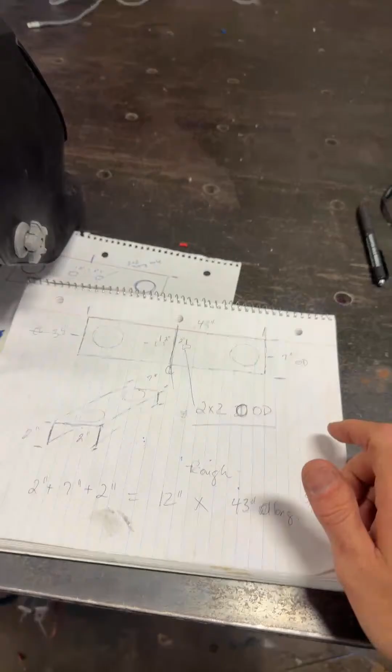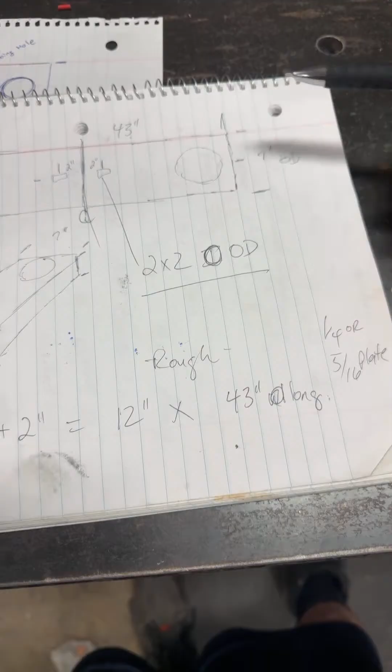So let me show you what I got going on. I'm building a chain bridge and I need it to be 7 inches on the inside. I need it to be 7 inches on the inside right here. So from here to here, I need it to be 7 inches. From here to here, I need it to be 2 inches. And from here to here, I need it to be 43 inches long.

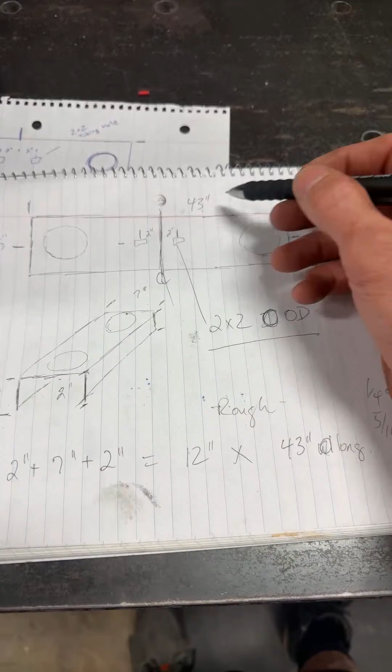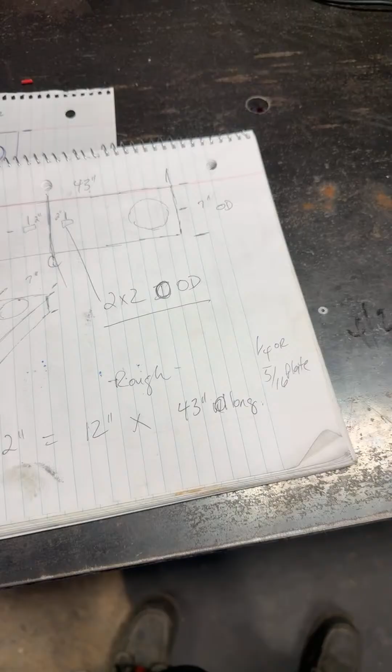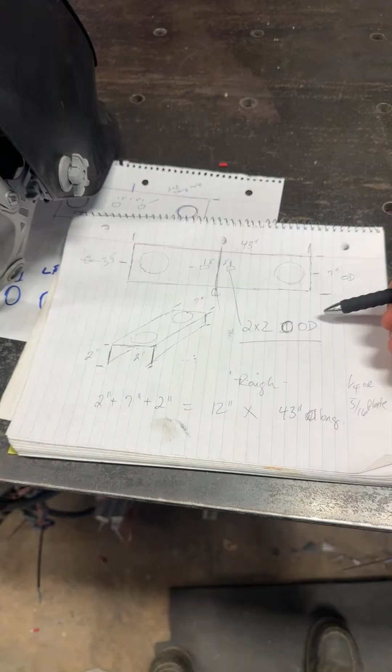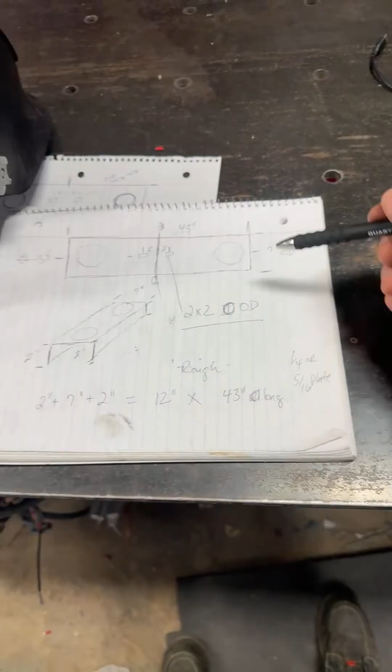Oh, appreciate it. All right, so I went up to the place where I used to work at a long time ago in high school. Yeah, it's a nice car, it's a nice car. So I want to build this out of 1/4 inch or 5/16 plate.

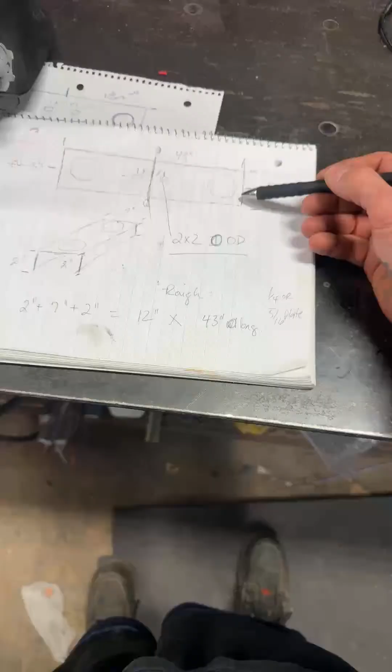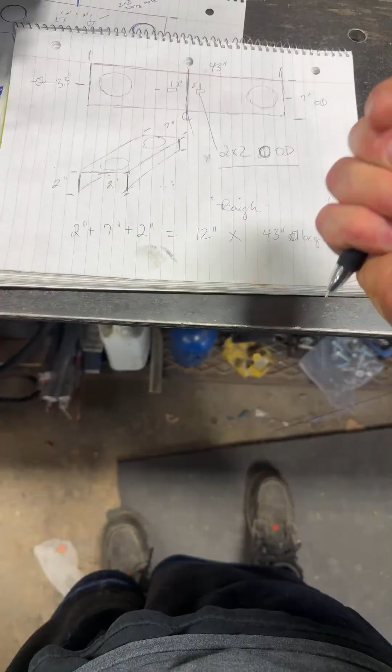So what I asked them to do was, I asked them to cut me a piece, shear me a piece of 1/4 inch or 5/16 plate. 2, 7, 2, so that's 7, 8, 9, 10, 11, 12 inches. So I need a piece of plate that's 12 inches wide by 43 inches long. Right, that's what I need.

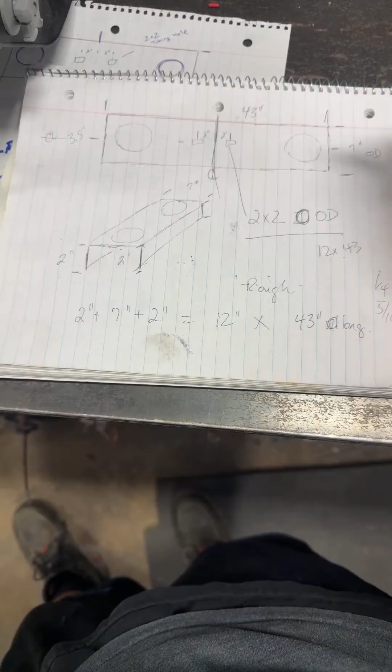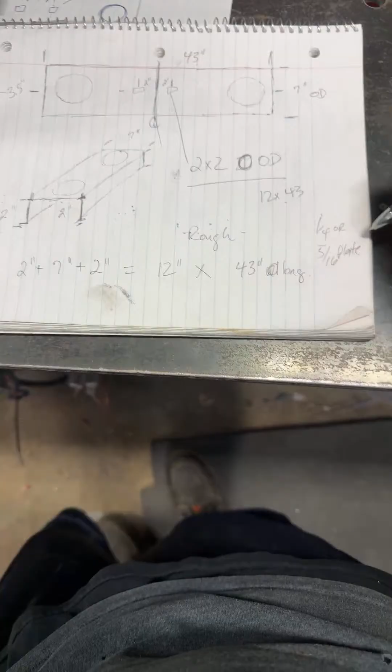Then, since they have a 100-ton press up there, I told them to bend it 2 inches, 7 inches, 2 inches. So they're going to make me, out of 1/4 inch or 5/16, whatever they had, at least 1/4 or 5/16. 5/16 is thicker than 1/4.

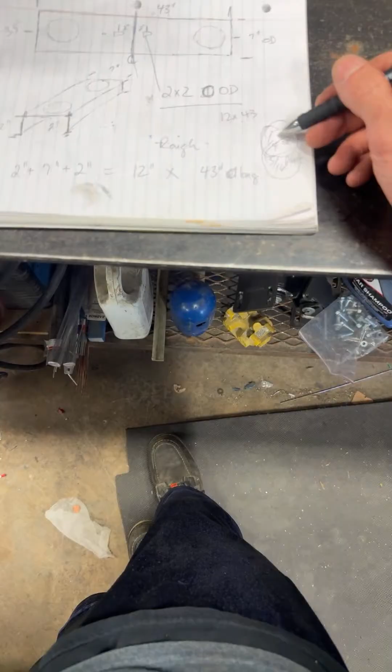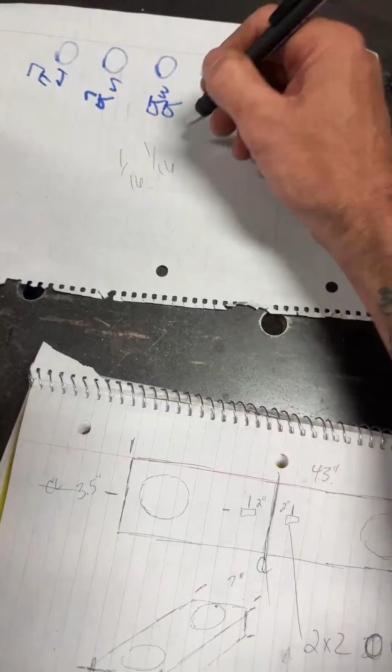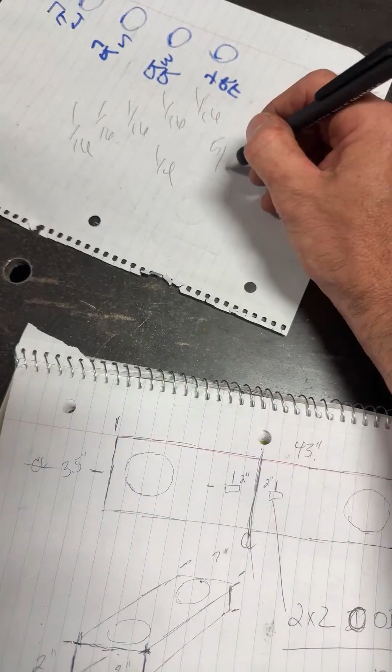Because if you look, you got 1/16, 1/16, 1/16, 1/16 - right, you got 4, so that's 1/4. If you got 5/16, that's 5/16, that's a 1/16 thicker than 1/4. So I told them either 1/4 inch or 5/16. So they said, cool.

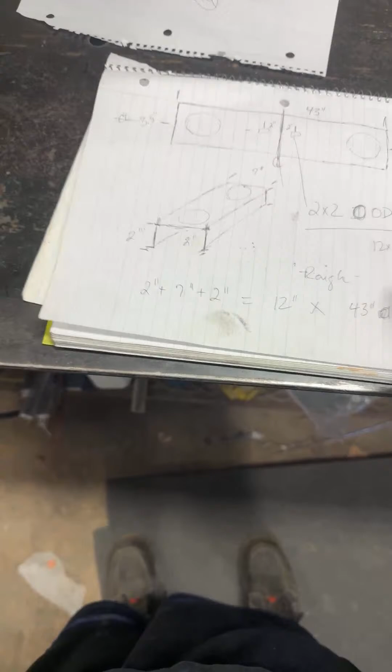So they're gonna make this today, they're gonna make the channel for me. So once they make the channel and I get the channel back, then what I'll do is I'll come over and I'll cut this hole out, I'll cut this hole out.

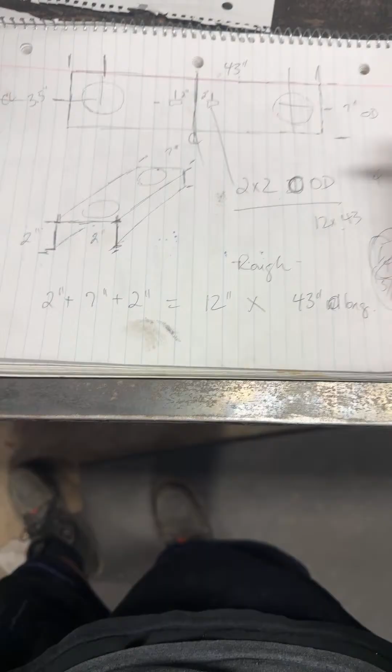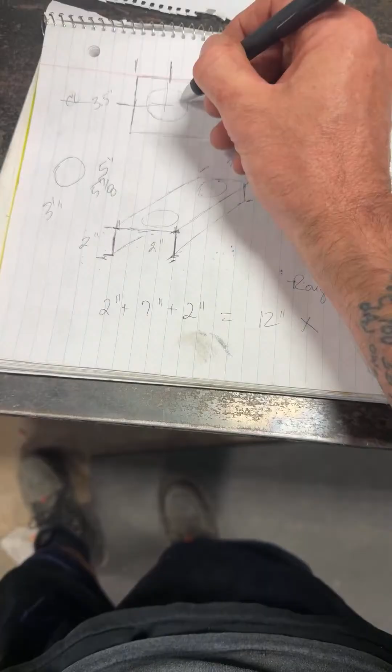And then also, I got a piece of pipe. I got some pipe that's 3 inches long. Actually, it's 5-inch pipe, which measures 5 5/8 on the inside. So it's 5 5/8 on the inside. I'm gonna put stovepipes or raised, whatever you want to call it - I'm gonna put spring pockets.

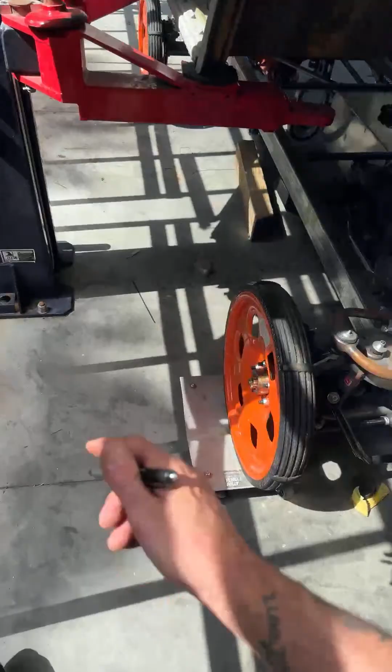I seen one guy build his chain bridge, and all he did was put a piece of 3-inch pipe to hold the spring. And when I mean hold the spring, these are not the springs, but this just kind of gives you an idea - these are the springs, these are the springs for this.

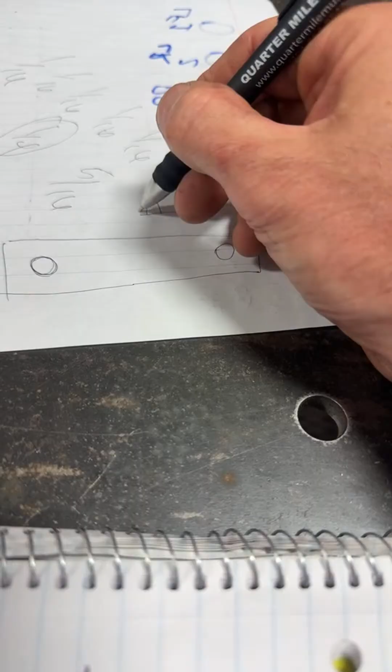So I watched this one guy, he didn't do drop pockets, I call them drop pockets. So what he did was, he took the piece of channel, right, he took the piece of channel and he welded a piece of pipe on the inside, and then the spring set like that, and then here's your rear end. I know this is upside down, right.

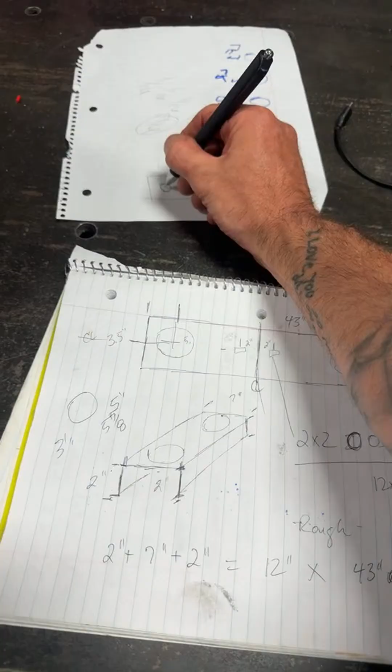So he made a piece of pipe that went inside here. So when it was on the chain bridge, when the spring was in the chain bridge pocket, there was a pipe that went in here. Then the hydraulic cylinder goes through here, and then on the chain bridge, there was another pipe, 2 1/8 pipe, DOM tubing, that the hydraulic cylinder went through so it doesn't move.

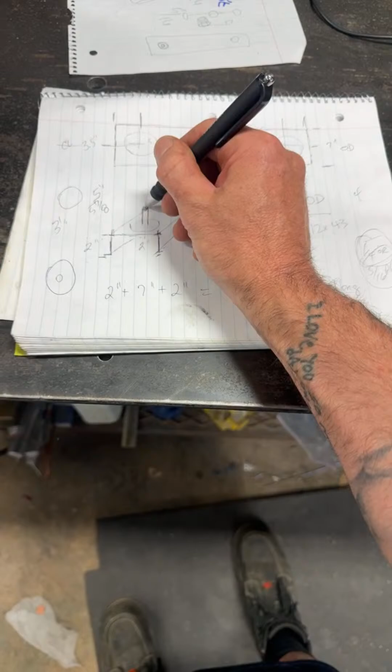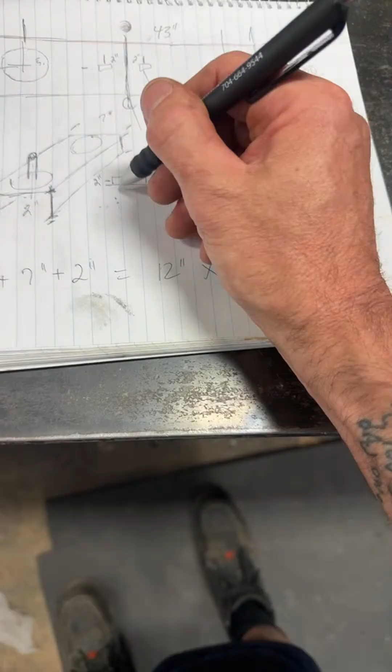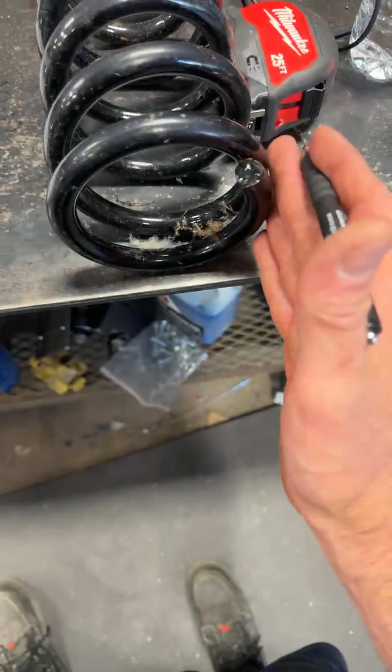I'm not doing that. I am putting a piece of tubing, DOM tubing, for the cylinder to run through. But I am doing raised pockets, so when you look at it from the side, I'm doing raised pockets about 2 inches, I think that's where I'm at. So what that's going to do is let the spring set into this another 2 inches. Plus it'll have a pipe in the middle that holds the spring, so the spring will be cradled on the outside and on the inside.

Yes, yeah, that's right. I'll be on the backyard boogie welding pieces together. Hey, there's nothing wrong with that, Elko. I just can't do that, you know what I mean?

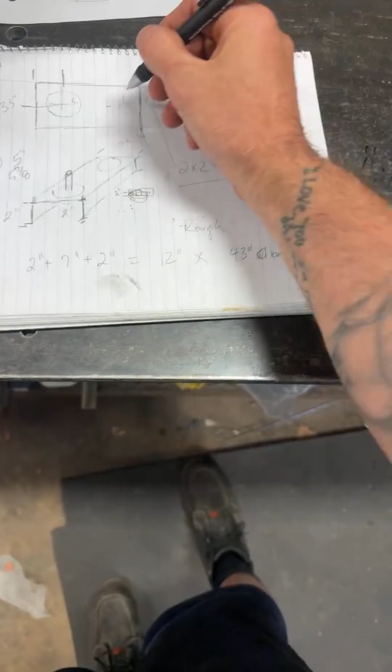So that'll be one piece. And then in the center right here, we're going to cut two. I'm going to cut 2 1/8 by 2 1/8 holes right here.

All right, so you go center line.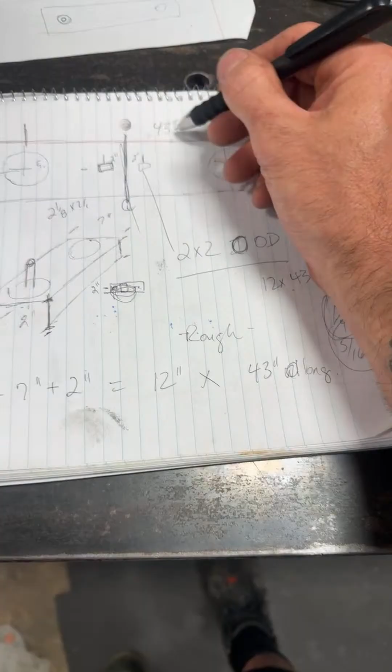Man, I found a lot of videos on YouTube on building chain bridges, and nobody will give the information. Nobody will give numbers. They just say, I'm building a chain bridge, they don't give no numbers or nothing. I guess they're afraid somebody's going to take some money out of their pocket, man. There's 6.8 billion people in the world, and you're worried about somebody trying to steal some money out of your pocket. My clients are not your clients, and your clients are not my clients. I don't understand. But just as soon as I get all this material on the table, you better bet your sweet ass that I'm going to give every measurement out online, every bit of it for free.

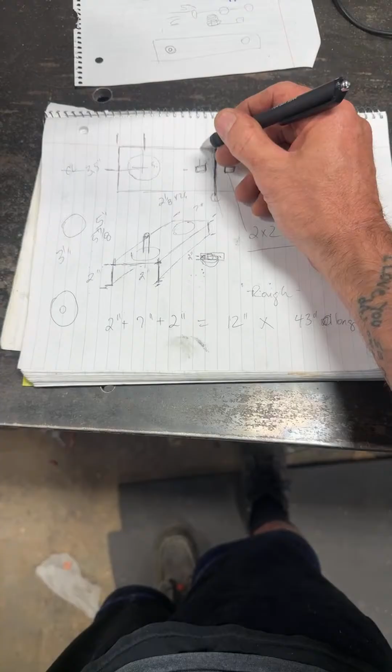I don't understand. So I'm going to come center line. So you got 43, so half of 43, you come half of 43, and then I'm going to measure over 2 inches this way and 2 inches this way, and then I'll center line it this way, which will be 3 1/2, and I'm going to cut a 2 1/8 hole right there. And that 2 1/8 hole right there is going to be for this right here.

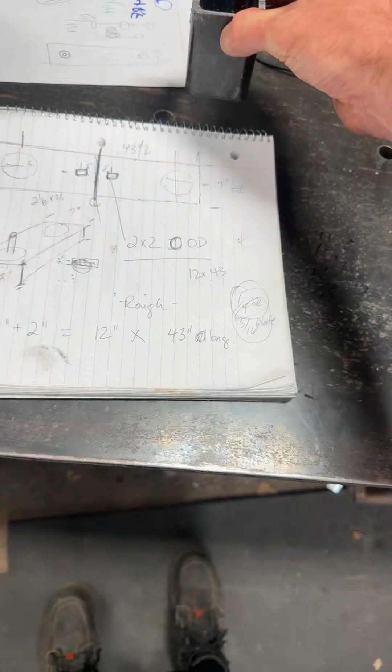So this is going to be the chain pocket. So this will go in. There'll be 4 of these. There'll be one here, and there'll be 2 on the axle, right?

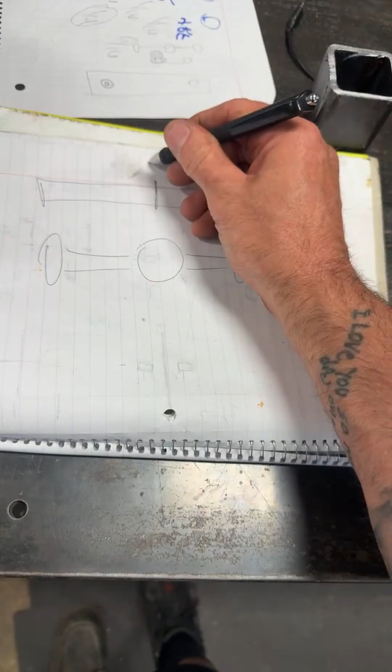So basically, you got the rear end, right? You got the rear end, and then you got your chain bridge, right? So center line, that's what that means, center line. I'll have one of these there, and I'll have one of these there. And then you'll have the spring, then you'll have your hydraulic cylinder. I'm running power balls, so you'll have a power ball, right? Okay, you have your pocket, then you have your spring, then you have your cylinder, and you have your power ball pocket, right?

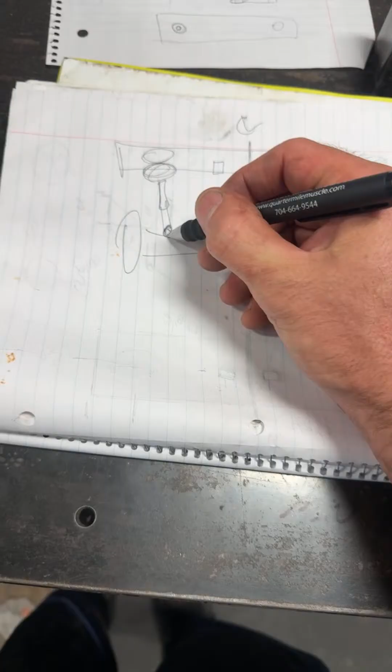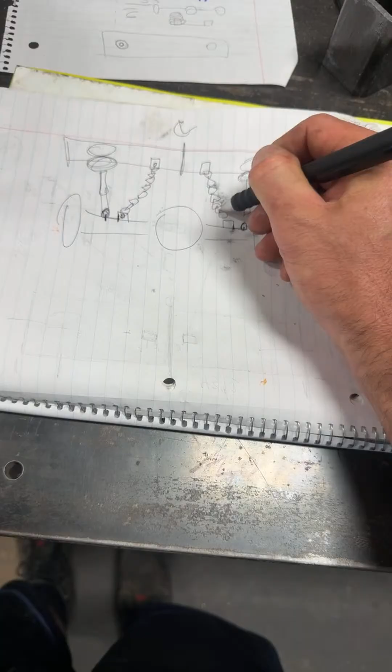You measure from the edge of the center line of this cylinder over 2 inches. Everybody's going over 2 inches. And then you put another one of these on top of the rear end, all right? Then you drill a hole, and then you run your chains, right?

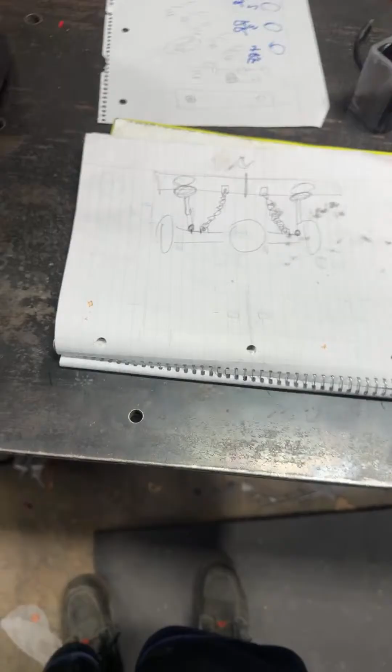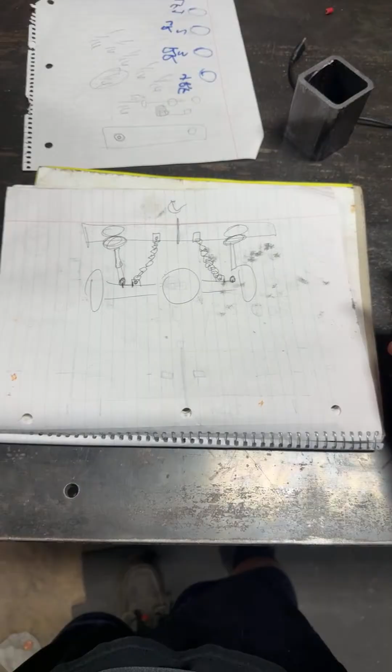Oh yeah, it's- I'm not doing it for competition. I'm doing it to ride, man. I don't give a shit one way or the other. I'm doing it to ride. I don't care nothing about trophies. I don't care about competition. I've already got all my stuff in my life. My first part of my life, I done all that. Got awards, got SEMA awards, got all that. I ain't into that, look, I'm not into that.

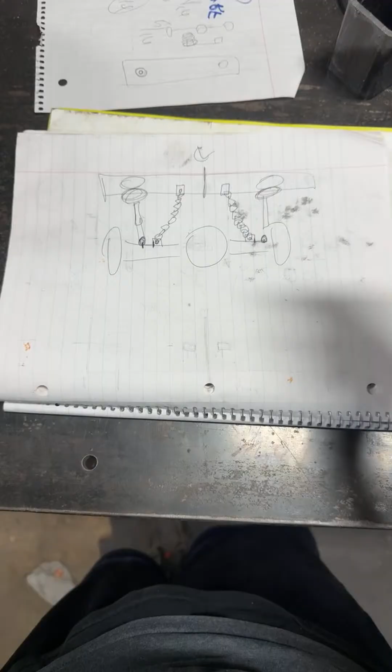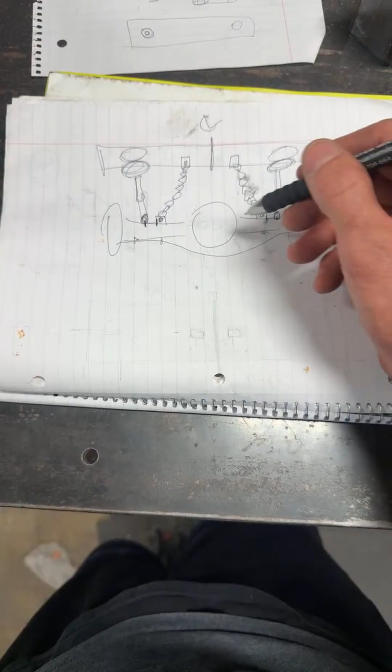So then I will brace up the rear end. I will bridge this, and I'm probably going to run some DOM tubing and build a frame, and then I'm going to do it this way too. I'm going to brace this up. So basically, here's your frame rails, right? These are your frame rails, and then you chain bridge. By doing it this way, you got your cylinders.

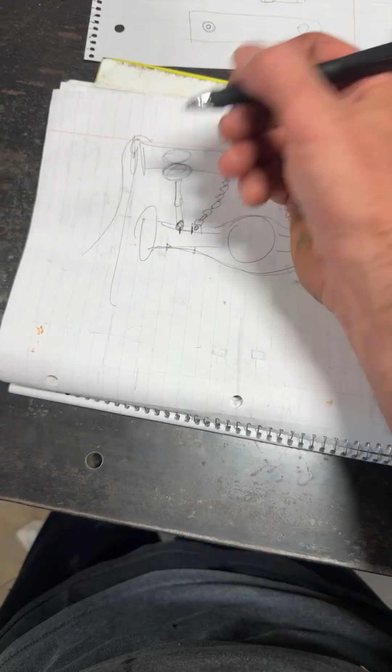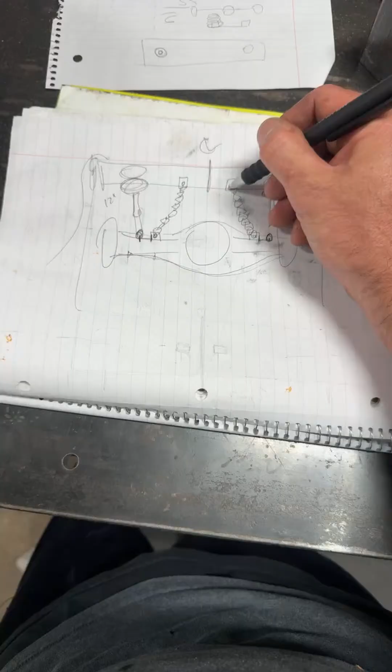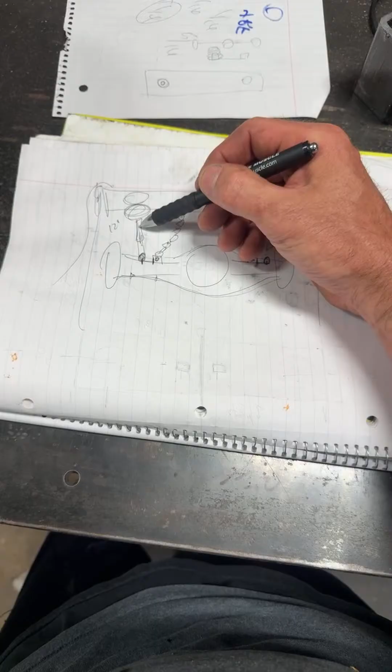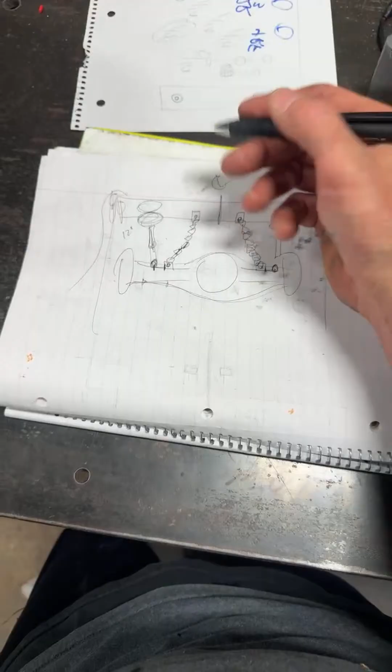Let's say you got a 12-inch cylinder. So what you do is you cut the difference and you shorten your links by a few links. And what that does is that gives you a pivot point. So basically how that works, it's a pivot point. So when you add fluid to this cylinder and this cylinder pushes up, what happens is this cylinder is putting a lot of pressure. And then this chain gets tight. And as this chain gets tight, it kicks it, it pivots. And the whole car pivots, all right?

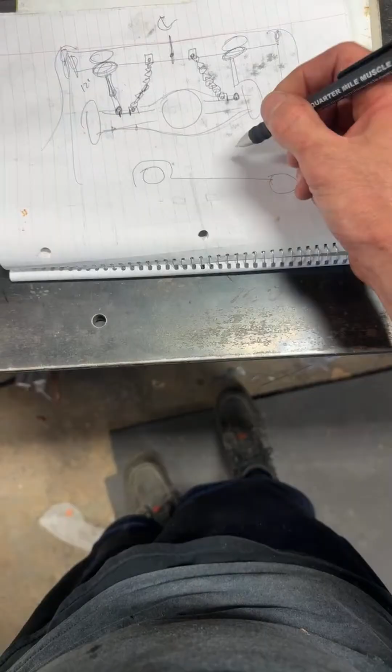So when that pivots, what happens is your front wheel- you get standing three wheel. You get standing three wheel. So that's what happens.

So that's what I'm working on. I'm getting all my parts together. I got a tracking number. It says all the hydro stuff is supposed to be here next week after Memorial Day. So we'll just see.

But let me show you what we're doing right now. So I went and picked up some rebar, cut this rebar, and I'm putting this rebar from there to there. You're probably wondering why, so let me show you what I'm doing.

Oh yeah, I got a bunch of stuff ordered for this. I got another fuel pump ordered because the fuel pump's bad, so we're gonna put a new one in. Matter of fact, I went and got it today. Here's the fuel pump, I got all the fuel pump stuff, so now I can put a new fuel pump on this and get it going.

All right, so this is what we're gonna do. Let me show you. Just let me show you what we're going to do. Y'all stay with me for just a second, stand by. I appreciate you. All right, here we go, let me show you what I'm doing.

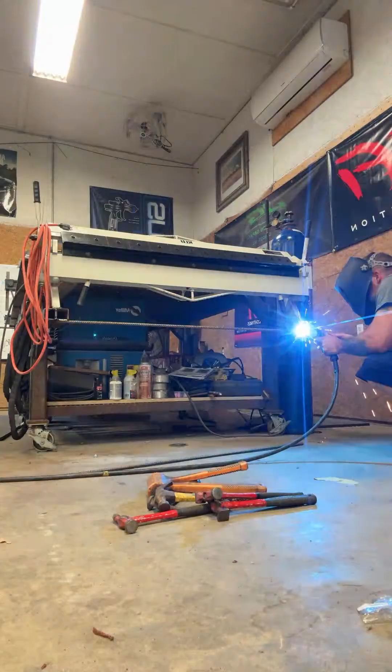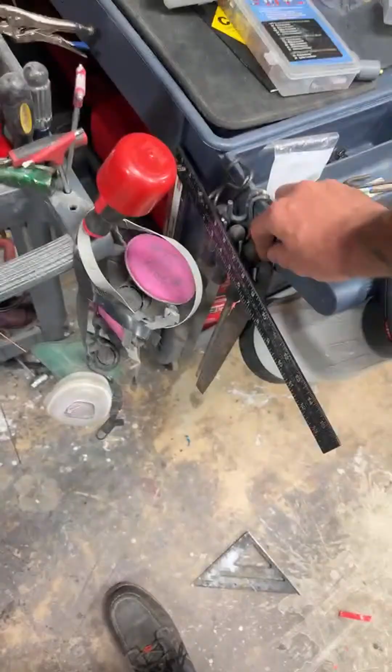Also, I mean, I can get, I can clean up my carts. I can clean my carts up. Take my flat bastard files, you know what I mean? I can come over here and look at here. Look.

Look at her. Huh? What y'all think about that? Try to be a little bit more organized. Look at these flower pot holders I made a long time ago. Look at these flower pot holders.

Check these out, I turned them into daggone drop cord holders. So that's where I'm at on that. Oh, y'all want to see something cool, man?

Let me show y'all something, y'all ain't gonna believe this. Damn telemarketers, man, I swear they'll come through and mess up your whole news feed, even though you got daggone do not disturb.

That finger brake is on wheels. It just transferred mess from one cart to another. No. Mike, this is my welding table, this son gun right here don't get moved, this thing don't get moved much. But I see what you're saying, yeah, I just moved my mess from one side to the next.

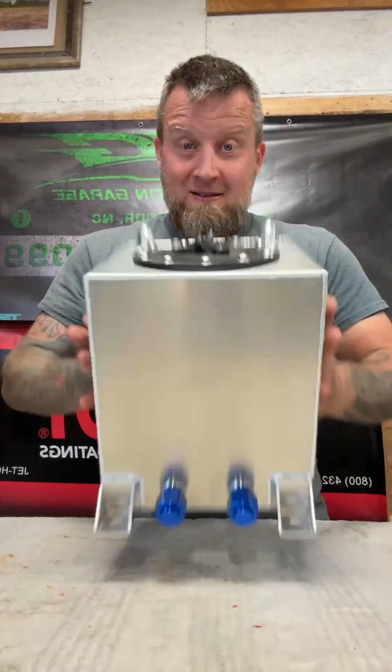Look at this tank. I got to get a haircut today, too. Where's Unc at? Unc, I need a haircut.

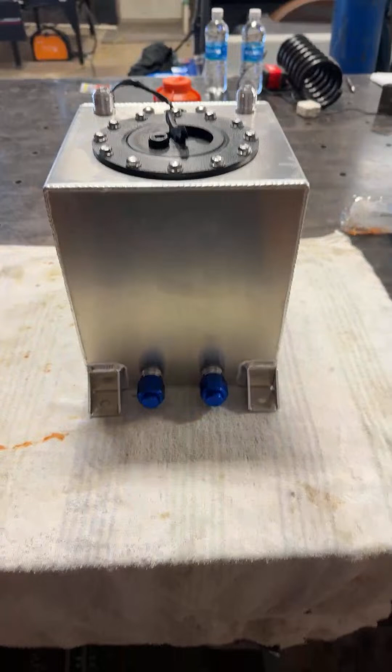Look at this gas tank. This is a 2.5-gallon gas tank. Now they make them bigger, they make them 10 gallons, 8 gallons, 4 gallons, 15 gallons, 20 gallons. But look at this fuel tank, right?

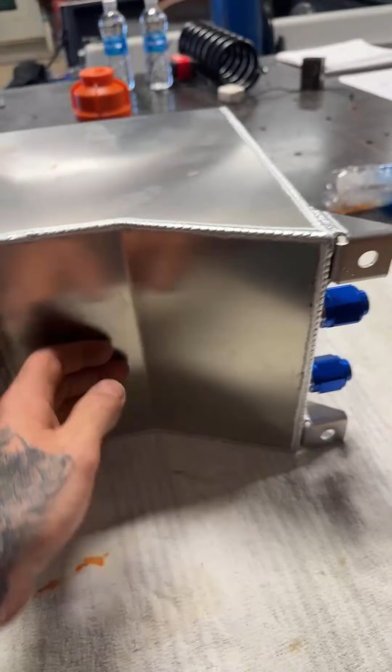First of all, let's look at the welds. Very, very nice welds. Let's look at the bottom. It's not completely flat on the bottom. The reason why is because this is the pickup, so all the fuel runs right here. It's actually called a drifter, for drift racing.

All right. Hey, if Unc gets me right, I'll give him five dollars.

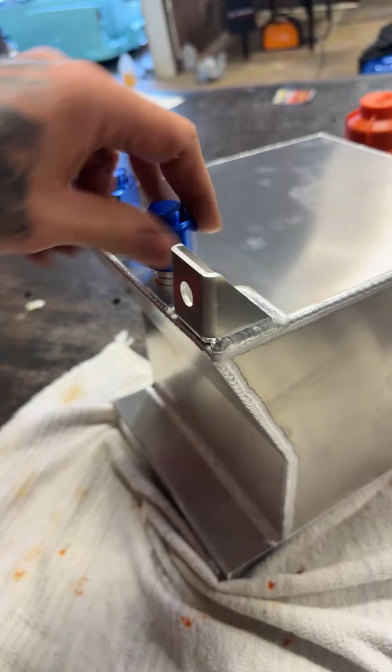This thing is really, really nice. These are AN fittings, these are -10, so it's basically 5/8. It did come with two plugs, so I don't have any -10s, I had to order them. So I ordered -10s, from -10 to 3/8 fuel injection line. So that's that.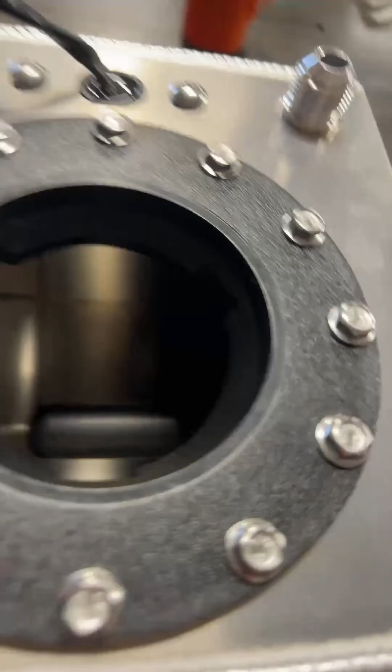They make these in black, but I went with aluminum. It also has a gas cap, it's vented. And it also has foam in it to keep it from sloshing. There's a little bit of foam in there, a foam ball, to keep it from sloshing. It also has a GM style sending unit, so it has a gas level in there.

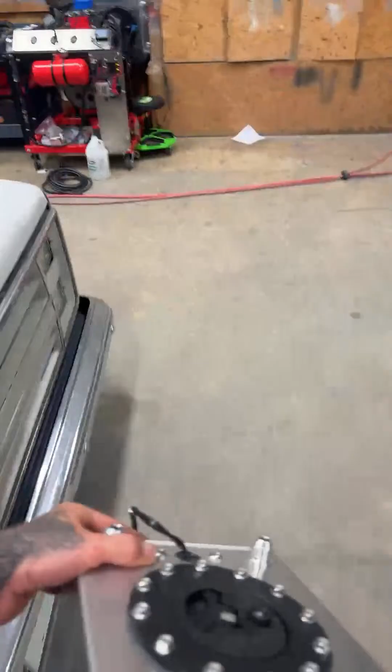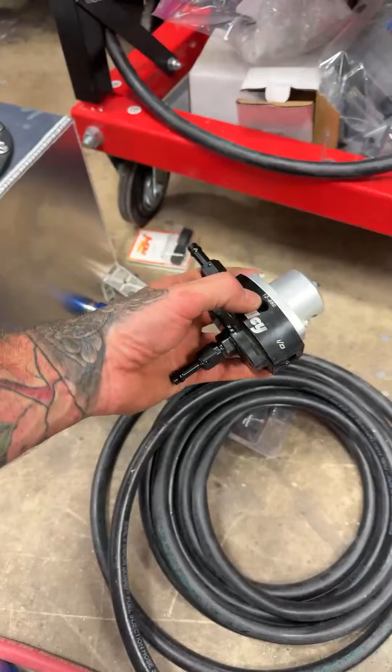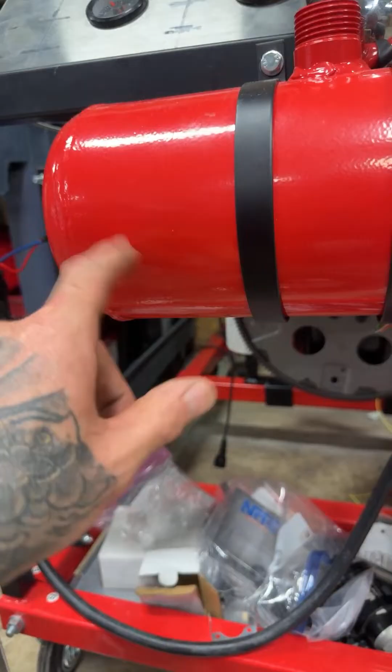So anybody want to take a guess how much this thing was? I'll tell you, these fittings right here are like $12 or $13 a piece. This, Mike, is actually for my startup cart, because this is fuel injection and I need a return. So basically I'm going to bolt this to this because I got to have a return. I got to put this fuel pressure regulator on to have a return because this is fuel injection. That's what I got that for, because I didn't want to drill into this and weld bungs on it and all that. I just didn't want to do it.

So this right here, on Amazon, shipped here to the house, was $52. $52, there's no way. See, these are AN fittings, these are 3/8. There is no way you could build this for $50. You got over $50 in just material. So that is super, super nice. I'll drop the link down after this live to the company.

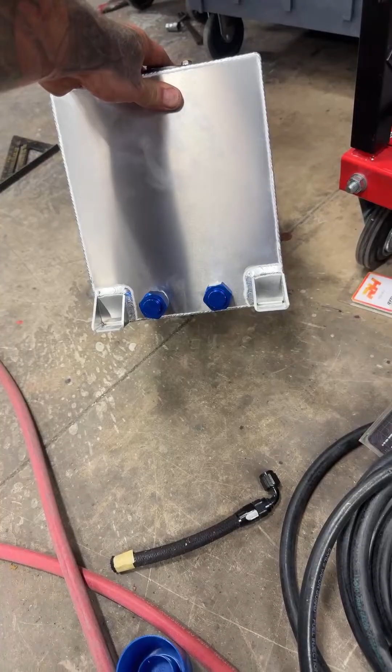But like I said, they make all different kinds. So I'm really thinking about it. I know, Mike, that's what I'm saying, the labor rate just to weld that is more than that.

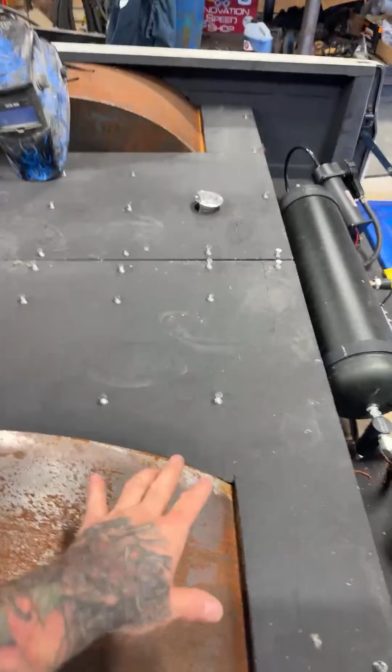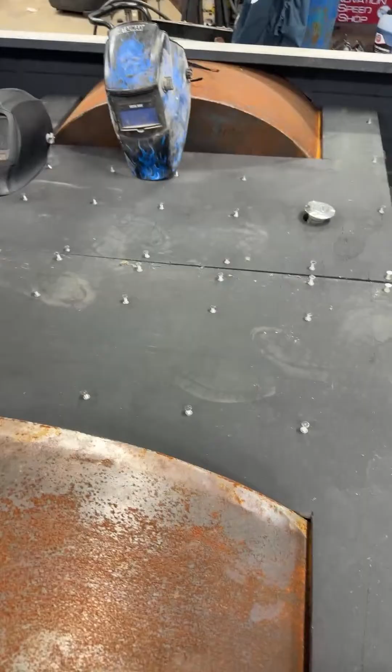So the fuel tank, the fuel cell for this is right here, underneath this. And I'm going to build - the wood is just to cover it up. Once it's all said and done, I'll take the wood off and put a metal floor, bead roll it and all that stuff. The wood is here because the plan in the beginning was to have a speaker box over the whole back of the truck, and I needed something to screw the 3/4 laminated board down into. That's why this is wood.

Well, the wood's coming out and now we've changed directions. There is going to be a speaker box here, but it's all going to be metal floor. The speaker box is going to be underneath the floor with a picture window with access. It's hard to explain, but stay with me and you'll see it. So all this is coming out, I'll take this wood as a template, cut metal out, and weld the floor so it'll be a complete metal floor. When you come up to the truck, you won't see nothing - it'll be a metal floor all the way up, and then a picture window where you can see the audio, the blow-through box, and another picture window where you can see all the air ride.

Yeah, I mean, I'm not mad at them. You know what I mean? I'm not mad at them. So that's that. But I just wanted to jump on here, see what everybody's doing.

I've been wanting to do this for a while. I got a bunch more hammers, body hammers and metal hammers that I need to get out of my toolbox in the back, and clamps, and just put all that on there. So that's what I was doing. Look, I got the banner put up.

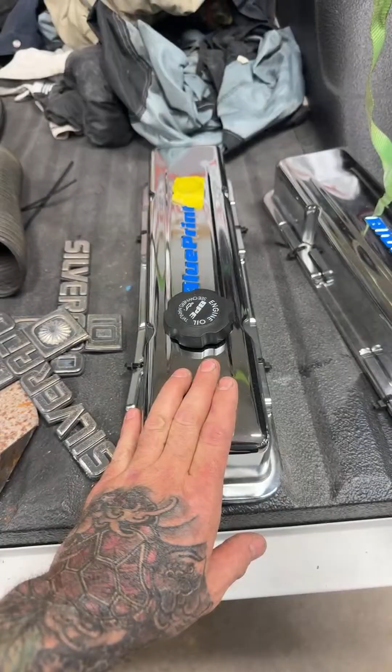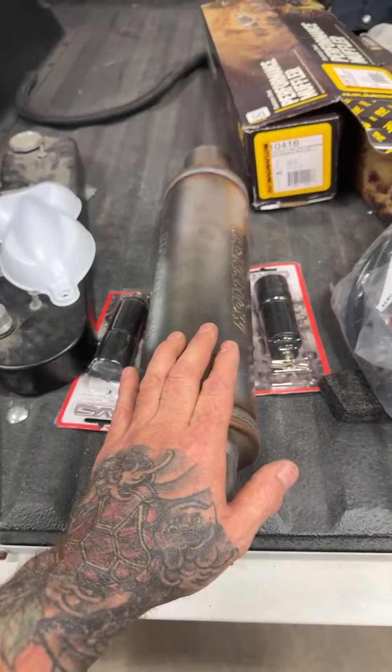Also, I got to box these up and ship these out. Somebody already hit me up, so these are gone. This is the mufflers for the 63 Impala. This is all the air ride stuff for the 63 Impala.

So that's that. But boys and girls, ladies and gentlemen, that's about all I got today. Like I said, I didn't want to be on here too long, about 30 minutes. But I will say this.

Everything that I say in my mornings, I write it down. It's right off the, I write it down.

Man, look at that sticker. That's a nice sticker, ain't it? Nice.

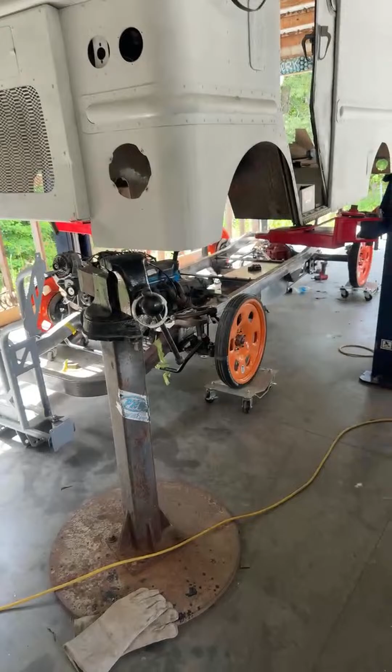That's about it, boys and girls, ladies and gentlemen. I'm going to be working on the... oh, let me show you this, and then we'll.

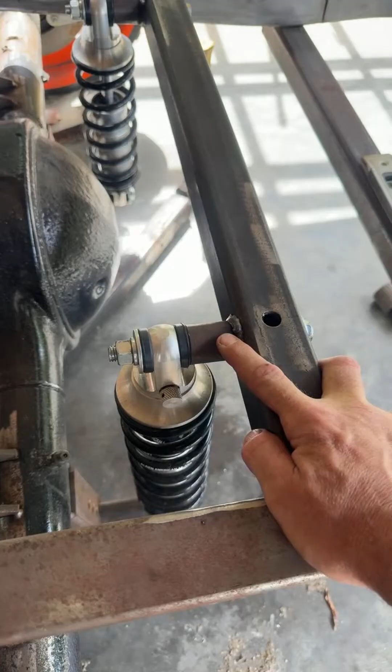I did get the cross member put in. I got the spacers welded on. I got this tacked in, so got the coilover brace in. Got that done.

So we're getting back on this, which is good. So I'll be on this, and then I got a lot of meetings tomorrow and Friday, so I don't know how much I'm gonna actually get done. If you don't understand about meetings and stuff like that, then you just don't understand.

I appreciate every single one of you. We ain't gonna talk about that cross member. We ain't gonna talk about that cross member short.

Mike, what you talking about? We ain't gonna talk about that cross member short. Oh, you mean talk about the short reel of the cross member? What do you want to talk about? You did a short on welding that cross member. Yes, I did, what do you want to talk about? Let's talk about it, I ain't scared. Let's talk about it, what you want to talk about? Say it, Mike, say it. I didn't think you was short for words. Say it. What about it? What about it? Let me put some power on this phone.